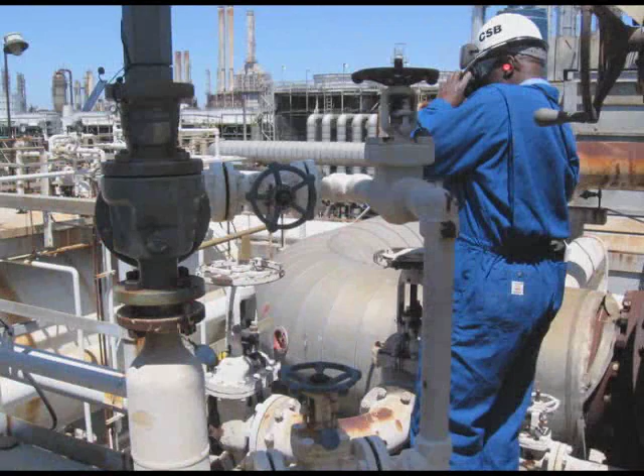This investigation was the largest and most comprehensive investigation in the history of the Chemical Safety Board. CSB Supervisory Investigator Don Holmstrom led a two-year investigation to determine the root causes of the accident. We interviewed over 370 witnesses. We looked at thousands of documents, literally millions of pages of documents, and we examined the plant, inspecting over 40 pieces of instrumentation and equipment.

The investigation team examined a wide range of safety systems, practices, and standards, and looked at human factors such as fatigue and communication between operators.

The board's report was released at a public meeting in Texas City on March 20, 2007. Then-CSB Chairman Carolyn Merritt presided.

Many of you here tonight had family members or co-workers who were victims of this explosion. To all of you, I express my deepest condolences and sincere wishes that society never allows another accident like this to occur. The tragedy at BP was the worst industrial accident in the United States in nearly 15 years.

The CSB concluded that it was the result of organizational and safety deficiencies at all levels of the company. We found that BP management had, for many years, overlooked warning signs of a possible catastrophic accident.

There's an old saying that if you think safety is expensive, try an accident. Accidents cost a lot of money, and not only in damage to plant and in claims for injury, but also in the loss of the company's reputation.

The reason why the Texas City accident has such an impact is because when people look at it, they can see that they are all in the same boat, that the problems which led to that accident are likely to be present at other sites around the world.

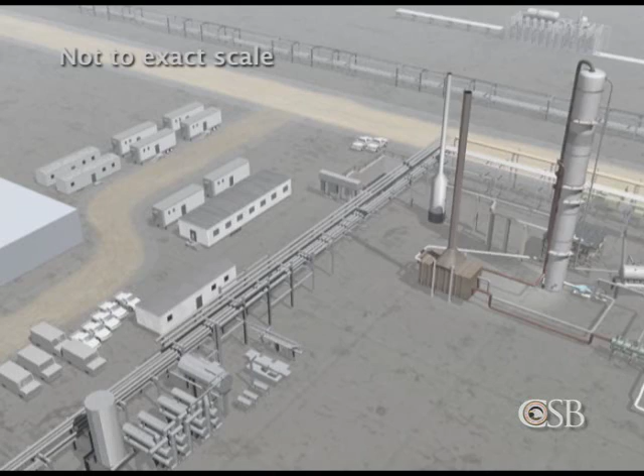Several units at the Texas City refinery had been shut down for lengthy maintenance projects, which required nearly 1,000 contractors to be on site along with BP employees.

BP had positioned a number of portable trailers close to process units for the use of contractors and other maintenance workers. Over a period of months, BP had located 10 trailers for workers servicing the ultra-cracker unit, including a double-wide wood-frame trailer that contained 11 offices and was regularly used for meetings.

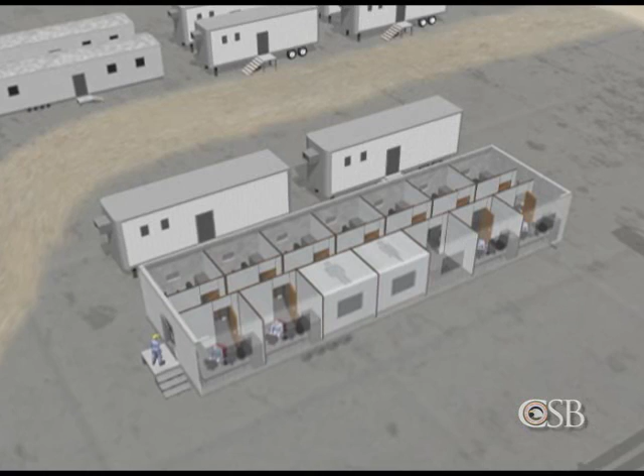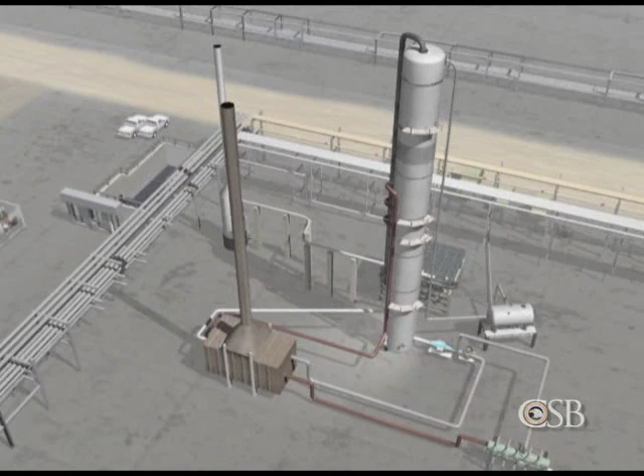Though these trailers were located near the isomerization unit, the occupants were not warned the ISOM unit was about to start up, a potentially hazardous operation.

At 2:15 a.m. on March 23rd, overnight operators began introducing flammable liquid hydrocarbons, known as raffinate, into a 170-foot tall raffinate splitter tower used to distill and separate gasoline components.

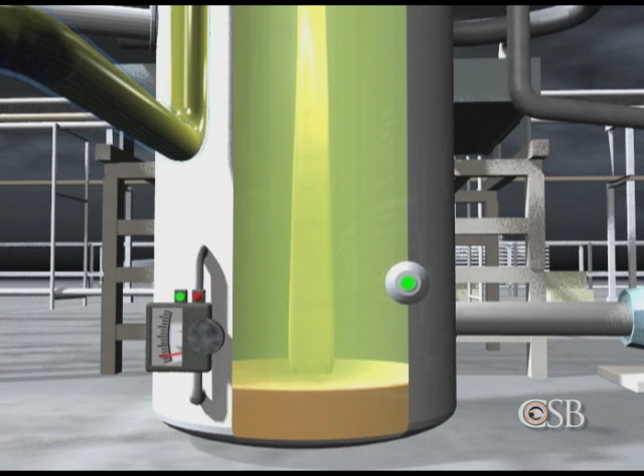Near the base of the tower, there was a single instrument that measured how much liquid was inside. It transmitted this information to a central control room located away from the ISOM unit. But this level indicator was not designed to measure liquid above the 9-foot mark.

During normal operation, the tower was only supposed to contain about 6.5 feet of liquid. But during startups, operators routinely deviated from written procedures and filled the tower above the 9-foot mark, concerned that if the liquid level fluctuated too low, it would cause costly damage to the furnace.

At 3:09 a.m., as the liquid neared the 8-foot mark, a high-level alarm activated and sounded in the control room. But a second high-level alarm, slightly further up the tower, failed to go off.

By 3:30 a.m., the level indicator showed that liquid had filled the bottom 9 feet of the tower, and the feed was stopped. The CSB later estimated that the liquid was in fact at a height of 13 feet. But operators could not know the actual level because the indicator only measured up to 9 feet.

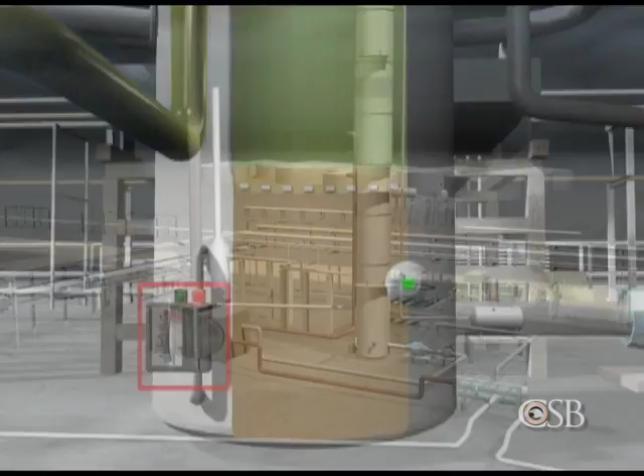The lead operator had been overseeing the startup from a satellite control room within the ISOM unit. At 5 a.m., he briefly updated the night board operator in the central control room about the startup activities. The lead operator then left the refinery early, an hour before the end of the shift.

A new board operator arrived in the control room around 6 a.m. to start his 30th day in a row working a 12-hour shift. He spoke briefly with the departing night shift operator and then read the logbook to prepare for the startup. But the logbook did not clearly indicate how much liquid was already in the tower and equipment, and it left no instructions on routing of the liquid feed and products when the startup resumed. Instead, the control board operator only found a one-line logbook entry that said, ISOM brought in some RAF to unit to pack RAF with.

At 7:15 a.m., the day shift supervisor arrived. Because he was more than an hour late, he received no formal briefing from personnel on the night shift about conditions in the ISOM unit.

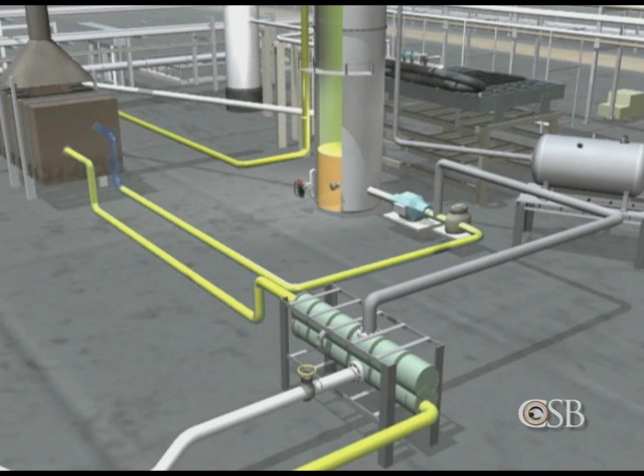At 9:51 a.m., operators resumed the startup. They began recirculating the liquid feed and adding more liquid to the already overfilled tower. As new feed was added, startup procedures called for regulating the liquid level in the tower using the automatic level control valve.

But the board operator and others had received conflicting instructions on routing the product. As a result, this critical valve was left closed for several hours, blocking the flow of liquid from the tower.

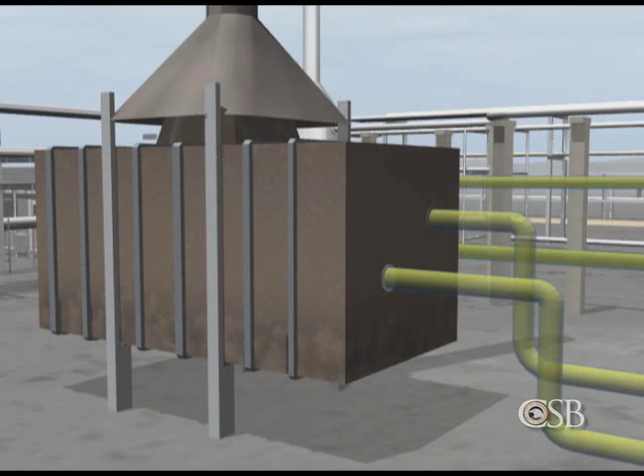A few minutes later, operators lit burners on the furnace to begin heating up the feed, part of the normal startup process. While the startup was underway, the day supervisor left the refinery on short notice just before 11 a.m. to attend to a family medical emergency.

Contrary to BP's own procedures, no experienced supervisor was assigned to replace him. This left a single control board operator, now without a qualified supervisor, to run 3 refinery units, including the ISOM unit, which needed close attention. The refinery had eliminated a second board operator position following corporate budget cuts in 1999 after BP acquired Amoco.

As the startup continued, the tower steadily filled with liquid, reaching a height of 98 feet shortly before noon, more than 15 times the normal level.

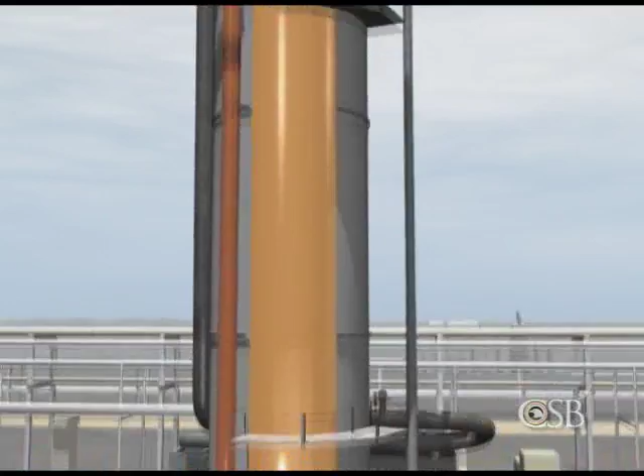But the improperly calibrated level indicator told operators in the control room that the liquid was at 8.4 feet and gradually falling. Furthermore, the control panel was not configured to clearly warn operators of the growing danger. It did not display flows into and out of the tower on the same screen, nor did it calculate the total liquid in the tower.

Meanwhile, the maintenance contractors, who were not involved in the operation of the ISOM unit, left their work trailers to attend a company lunch, celebrating a month without a lost time injury.

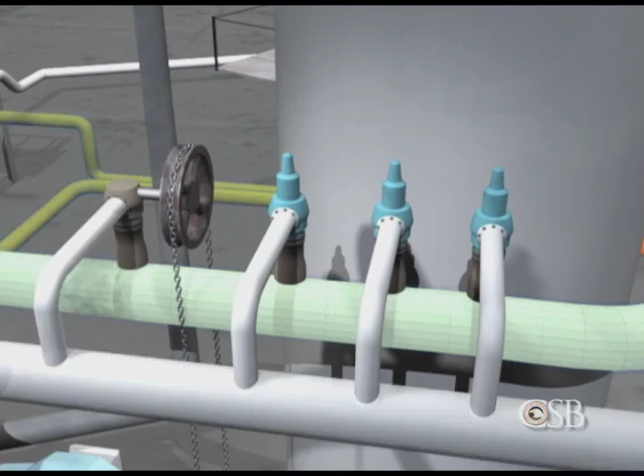At 12:41 p.m., an alarm activated as the rising liquid compressed the gases remaining in the top of the tower. Unable to understand the source of the high pressure, operators opened a manual chain valve to vent gases to the unit's emergency relief system, a 1950s-era blowdown drum that vented vapor directly into the atmosphere.

Operators also turned off 2 burners in the furnace to lower the temperature inside the tower, believing this would reduce the pressure. Nobody knew the tower was dangerously full.

The operators did become concerned about the lack of flow out of the tower and began opening the valve to send liquid from the bottom of the tower to storage tanks. But this liquid was very hot. As it flowed through the heat exchanger, it suddenly raised the temperature of the liquid entering high up the tower by 141 degrees Fahrenheit. It was now about 1 p.m.

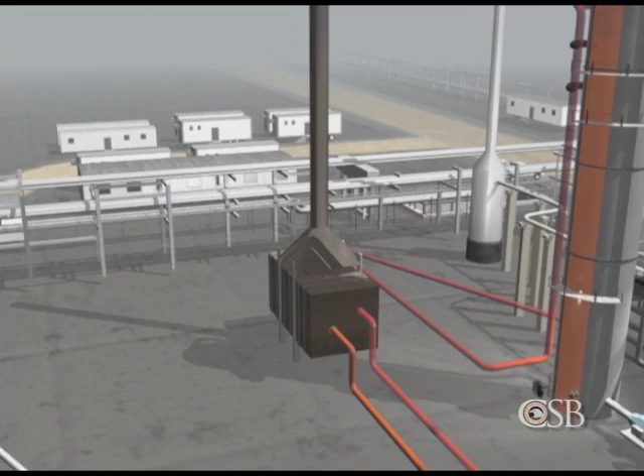Contract workers, unaware of the startup and the looming danger, returned from lunch and began a meeting in the double-wide trailer in the corner room closest to the blowdown drum.

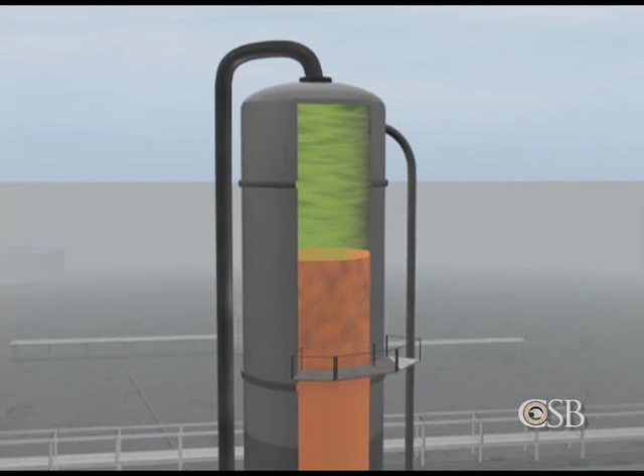Over the next few minutes, the hot feed entering the tower caused the liquid inside to start to boil and swell. Liquid filled the tower completely and began spilling into the overhead vapor line, exerting great pressure on the emergency relief valves 150 feet below.

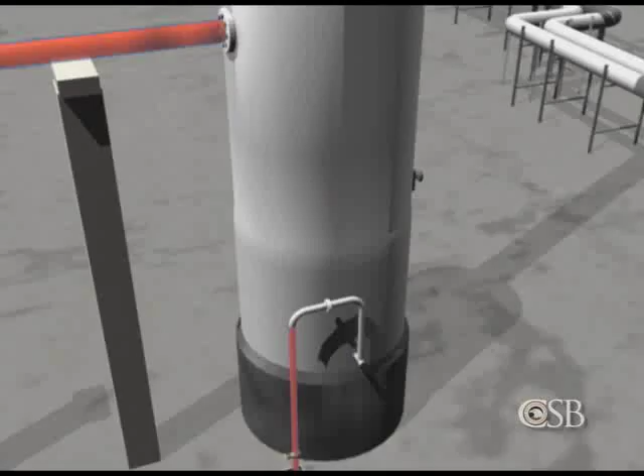At 1:14 p.m., the 3 emergency valves opened, sending nearly 52,000 gallons of flammable liquid to the blowdown drum at the other end of the ISOM unit. Liquid rose inside the blowdown drum and overflowed into a process sewer, setting off alarms in the control room. But the high-level alarm on the blowdown drum failed to go off.

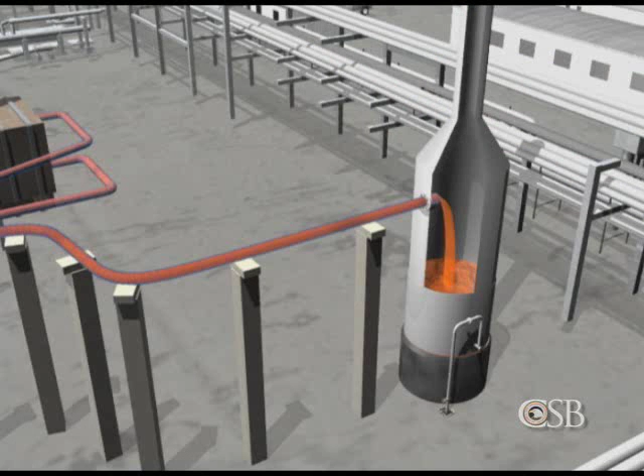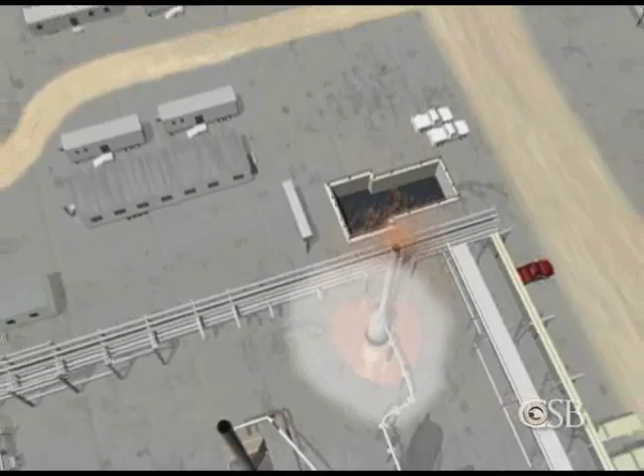None of the operators knew of the catastrophe unfolding in the ISOM unit. As flammable hydrocarbons overfilled the blowdown drum, operators nearby saw a geyser of liquid and vapor erupt from the top of the stack. The equivalent of nearly a tanker truck full of hot gasoline fell to the ground and began forming a huge flammable vapor cloud.

This scene, based on CSB computer modeling, shows how the vapor cloud expanded in just 90 seconds, engulfing the unit and the nearby trailers full of workers.

About 25 feet from the base of the blowdown drum, 2 workers were parked in a pickup truck with the engine idling. As flammable vapor entered the air intake, the diesel engine began to race. The 2 workers fled, unable to shut off the engine. Moments later, witnesses saw the truck backfire and ignite the vapor cloud.

Powerful explosions swept through the area. Computer modeling shows how the blast pressure wave accelerated through the ISOM unit, causing heavy destruction and igniting fires throughout the area. The workers inside the trailers were right in the path of the explosions. The fires continued to burn for hours.

12 of the 20 occupants of the double-wide trailer were killed, along with 3 workers in a trailer nearby. Dozens of others suffered serious burns, fractures, and other traumatic injuries. The wood and metal frame trailers were blown apart by the blasts. Firefighters struggled to rescue the injured and recover the victims.

50 large chemical storage tanks were damaged, and the ISOM unit remained shut down for more than 2 years.

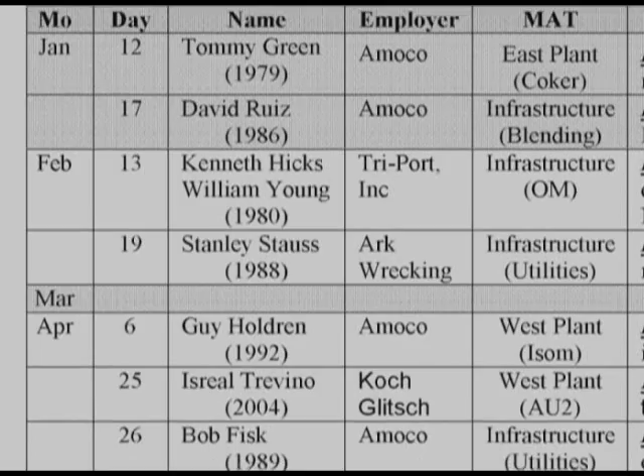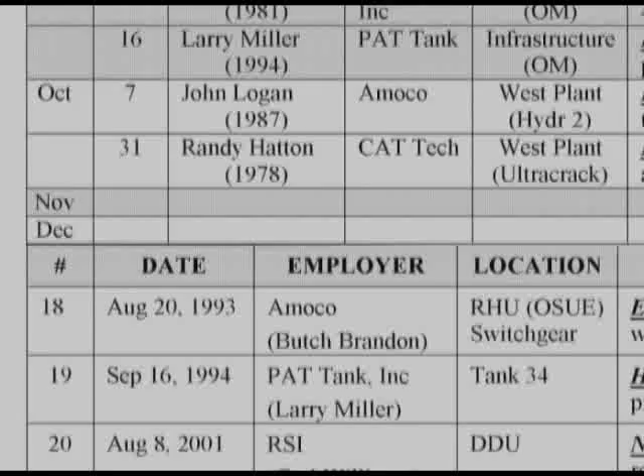During the early stages of our investigation, our team had noted there were multiple safety system deficiencies at the Texas City plant. We also found there was a history of fatalities at the plant. Prior to the March 2005 accident, 23 people died in accidents over a 30-year period at the Texas City refinery, beginning when it was owned by Amoco and continuing after BP acquired the refinery in 1999.

The CSB wanted to know what the connection was between this history of fatal incidents and the organizational and cultural factors. BP Corporation's lack of focus on preventing major accidents allowed budget cuts to be made without assessing the impact on process safety. The CSB found that cost-cutting, production pressures, and failure to invest significantly impacted the process safety performance at the Texas City refinery and left the refinery vulnerable to catastrophe.

After the merger with Amoco, BP ordered a 25% reduction in fixed costs at all its refineries. This impacted important process safety systems such as staffing, training, and mechanical integrity. The effects of the budget cuts became apparent in a number of internal BP documents made public following the accident.

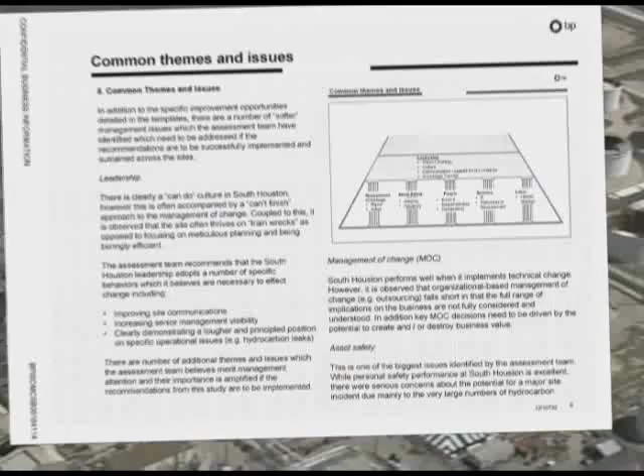In one, the refinery manager was quoted as having observed in 2002 that the infrastructure at Texas City was in complete decline. He ordered a study of the refinery's safety and mechanical integrity, a study which was shown to BP executives in London. That study warned of serious concerns about the potential for a major site incident following more than 80 hydrocarbon releases in the previous 2 years.

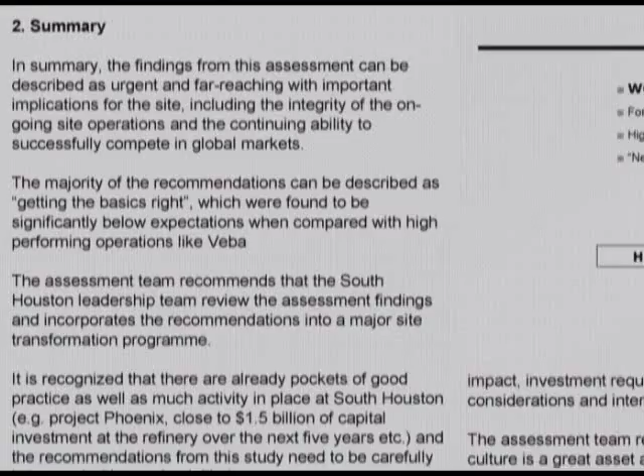The study also concluded that its own findings were urgent and far-reaching. A follow-up BP study in 2002 found the refinery's integrity and reliability issues were clearly linked to the reduction in maintenance spend over the last decade.

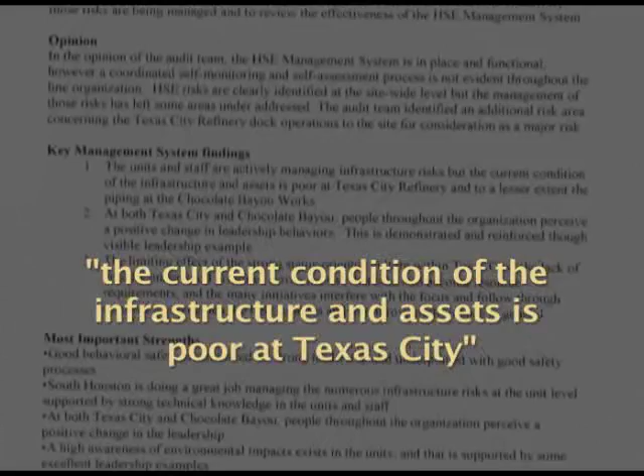In 2003, a maintenance assessment stated that cost-cutting measures have interfered with the group's work to get things right. Usually, reliability improvements are cut. And later that year, a company audit found the current condition of the infrastructure and assets is poor at Texas City, and that maintenance spending was limited by a checkbook mentality. Only the money on hand would be spent, rather than increasing the budget.

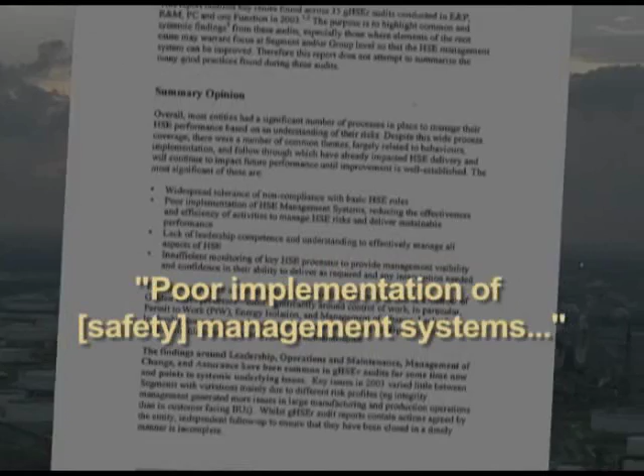In March 2004, BP auditors in London concluded that 35 business units around the world, including the Texas City refinery, suffered from a host of common safety problems, including widespread tolerance of non-compliance with basic HSE, or health, safety, and environmental rules, poor implementation of safety management systems, and lack of leadership competence and understanding.

There were a number of reports that were coming up to as high as the board level that indicated serious problems throughout the BP system. During 2004, the Texas City refinery had 3 major accidents. In addition to this process unit fire that caused $30 million in damage, 2 other accidents in 2004 resulted in 3 fatalities. Yet this same year, the refinery had its lowest ever recordable injury rate, a statistic that does not include fatalities.

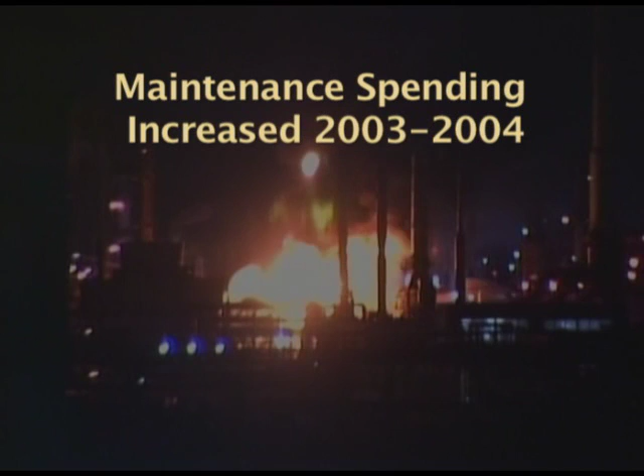The CSB found that maintenance spending increased between 2003 and 2004. But most of the increases were for responding to serious accidents and complying with environmental requirements, not for preventive maintenance.

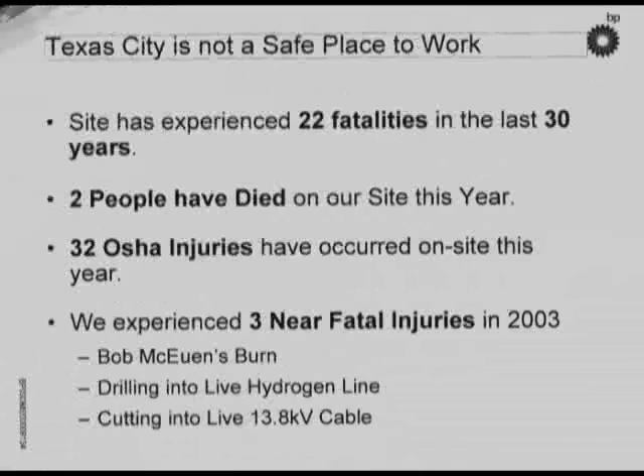Late in 2004, the Texas City refinery manager made a presentation to supervisors titled Safety Reality, reviewing fatalities at the plant over the past 30 years. One of the slides was entitled, Texas City is not a safe place to work.

BP did its own safety culture survey just prior to the accident. That survey indicated there was an exceptional degree of fear among employees of a major catastrophe. Among the findings: pressure for production, time pressure, and understaffing are the major causes of accidents at Texas City. Critical events, like failures or breakdowns, are generally not attended to. Production and budget compliance gets recognized and rewarded above anything else.

Sociology professor Dr. Andrew Hopkins has written extensively on the causes of industrial disasters. My feeling is that the solution to this problem of cost-cutting by senior people is to hold them responsible for the safety implications of those cost cuts, so that when they order a cost cut, they should personally be able to certify that these things will not have adverse safety consequences.

The Safety Culture Survey also pointed to the exceptionally high executive turnover at the refinery: 6 different business unit leaders, or BULs, in 7 years prior to the accident. The authors of the survey report concluded, we have never seen an organization with such a history of leadership changes over such a short period of time.

Many managers are in and out within a space of 2 years, and what they are assessed on is the profit they make on an annual basis. Now, am I, as a manager, going to spend a large amount of money to deal with some remote risk that is very unlikely to generate a major accident during my year or two on my watch here?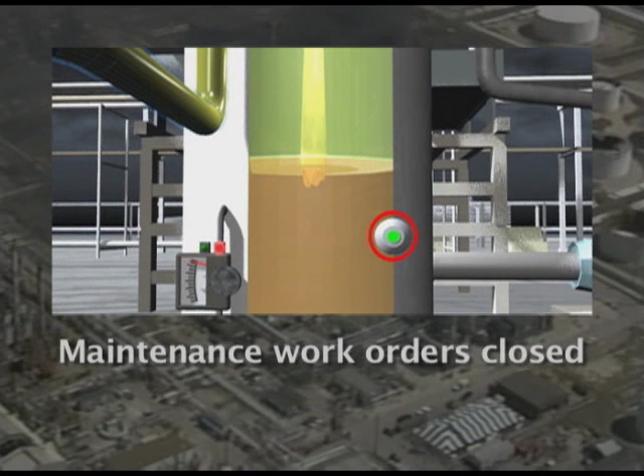For example, the tower high-level alarm had been reported as not functioning several times in the 2 years prior to the accident. But maintenance work orders for this alarm were closed, although the repairs were never actually made. Work orders could be closed out as completed, even though the work hadn't been performed.

This is important because we found that on the day of the incident, during the ISOM startup, there were a number of instruments and equipment that were not functioning properly.

On February 20th, 2005, a company safety manager wrote, I truly believe we are on the verge of something bigger happening. Then, 3 weeks later, a BP business plan recognized a number of key safety risks, including that TCS, or Texas City site, kills someone in the next 12 to 18 months. 8 days later, those fears were realized.

Here were these warnings. These audits were sounding very clear warnings. So why weren't they attended to? I think my feeling is that Texas City was virtually paralysed by the cost-cutting which had occurred at that site, and they were simply unable to respond to those warnings.

There needs to be somebody on the board of directors who can interpret those reports and be in a position to drive change effectively. The CSB's final report recommended that BP appoint an additional non-executive member of the board of directors with specific expertise in refinery operations and process safety.

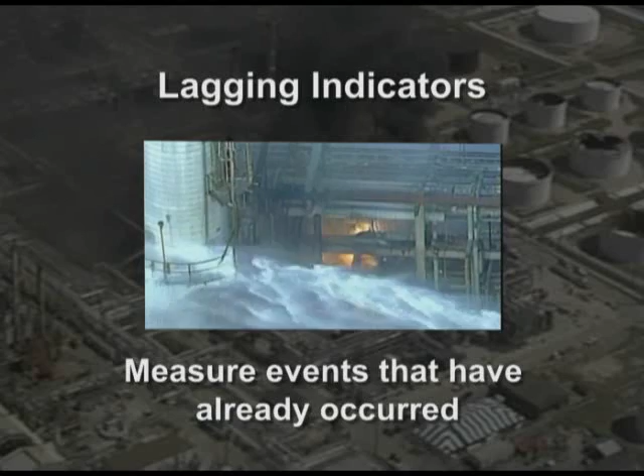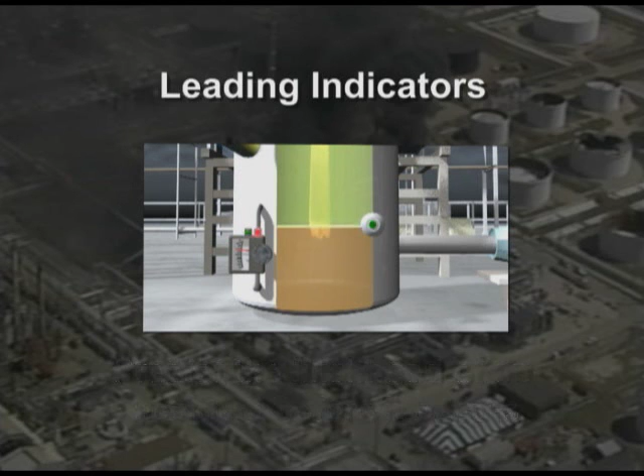You need to measure process safety performance with the appropriate indicators, both leading and lagging. Lagging indicators measure events that have already occurred, such as fires, explosions, and equipment failures. Leading indicators are designed to predict the likelihood of an accident before it occurs, for example, the percentage of equipment inspections that are overdue.

The opening of a safety pressure relief valve is itself an indicator that things are not as they should be. So we should count those and try to reduce the number of occurrences of those sorts of events.

But the investigation found that BP did not effectively use leading and lagging indicators to measure and drive process safety performance. For example, BP's pay plan rewarded managers primarily for controlling costs. The only safety metric used to calculate bonuses was the personal injury rate. Process safety was not considered.

The CSB final report recommended that the United Steelworkers Union and the American Petroleum Institute create a new standard for process safety indicators for the petrochemical industry. The board also called on BP to use leading and lagging indicators to strengthen refinery safety performance.

After an accident, managers often say, "I didn't know this was happening," or not happening, as the case may be. "If I'd known, I'd have stopped it." Now, this is bad management. It's the manager's job to know what is going on, and he can do that by going round, keeping his eyes open, and reading the accident reports in detail.

The CSB investigation noted that BP ignored numerous warnings of the potential for a catastrophic accident, a result of not having an effective reporting and learning culture.

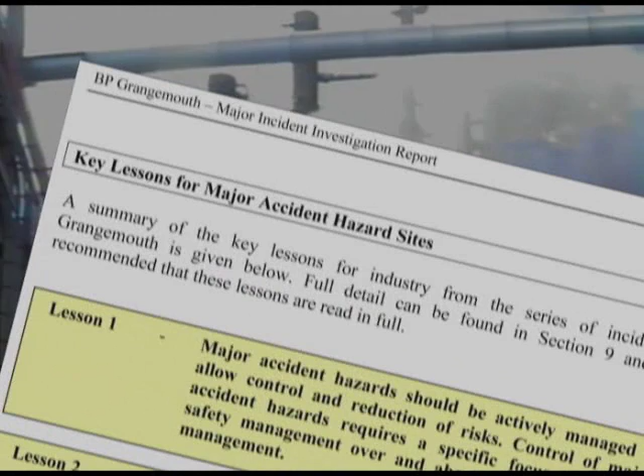There was a need for corporate and board oversight over process safety management. There was a need to develop leading and lagging indicators for process safety, and there needed to be an emphasis on process safety in order to prevent major accidents.

But the CSB found little awareness in Texas City of the lessons BP executives promised would be learned worldwide after Grangemouth. As British regulators concluded, BP's decentralized management structure impaired learning from previous incidents.

And the reason why BP failed to learn these lessons from other events, the reason why they seem to have this, what I would call learning disability, lies in the way in which the organisation was designed. It lies in the bonus systems of payment. It lies in the decentralised structure of the organisation. It lies in the organisational location of process safety experts.

The CSB found that following the 1999 merger with Amoco, BP dismantled Amoco's existing centralised safety structure. The reorganization left a diminished process safety function that no longer reported to senior refinery leadership.

I think one of the lessons coming out of that is that if an organisation judges something important, it will locate people towards the top of the apex in that organisation, people with responsibility for that. And the fact that the process safety manager was further down the line is yet another indication of the lack of focus on process safety.

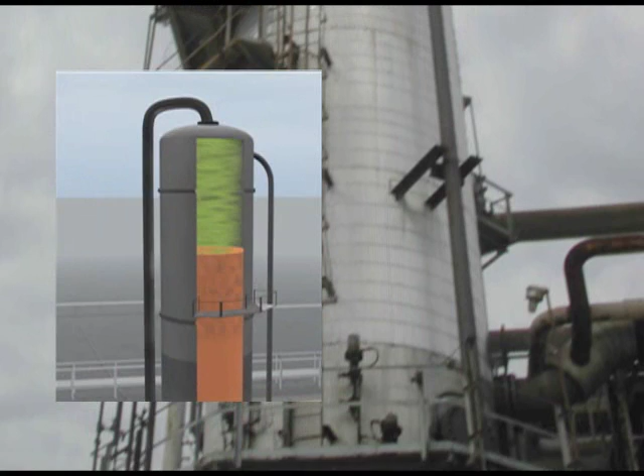But even though high levels and pressures could have led to a catastrophic accident, the previous startups were never investigated as near misses, and procedural deviations became accepted as normal. The CSB investigation also found 8 serious releases of flammable vapor from the ISOM blowdown drum, 2 of which caught fire between 1994 and 2004. Only 3 of the incidents were ever investigated.

It's widely recognized now that you should investigate near misses, or really near accidents as they're called, as thoroughly as you investigate accidents. After all, it's only a matter of luck whether a leak of flammable liquid or gas catches fire or not. In our final report, the CSB recommended that BP's Board of Directors establish a system to encourage reporting of incidents without fear of retaliation, to investigate and implement prompt corrective actions, and to communicate lessons throughout the company.

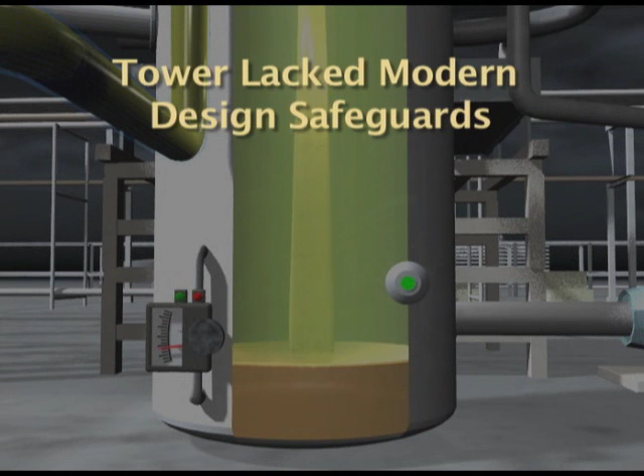The first choice after an accident is to say, how can we improve the design so this can't happen? How can we remove the opportunity for errors? Even as releases occurred over many years in the ISOM unit, BP continued using equipment based on outdated designs. The raffinate splitter tower lacked modern design safeguards, such as redundant level indicators and alarms, a differential pressure indicator, and automatic interlocks to prevent overfilling.

In a well-designed plant, a simple error like closing the wrong valve shouldn't result in an accident. The design of the emergency pressure relief system was also outdated. Relief valves vented hydrocarbons directly to the atmosphere through an antiquated blowdown drum, which was first installed in the 1950s. The CSB report said the hydrocarbons should have been routed to an inherently safer disposal system, such as a flare, to contain the hydrocarbon liquid and burn off flammable vapor.

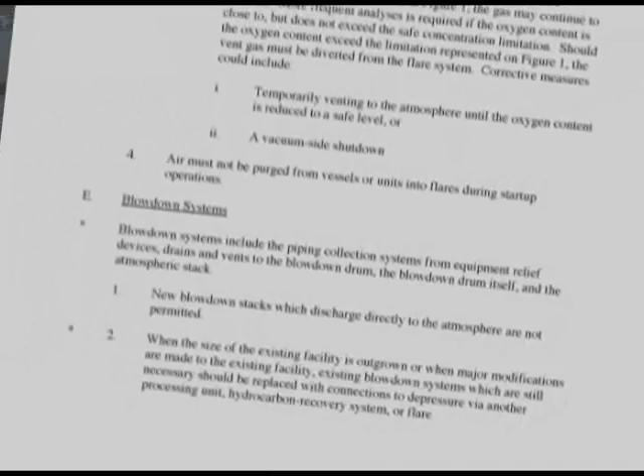In fact, the investigation found that Amoco's own safety standards, later adopted by BP, stated that new blowdown stacks which discharge directly to the atmosphere are not permitted. As facilities were upgraded, existing blowdown systems which are still necessary should be replaced. On several occasions prior to the incident, BP had seriously considered connecting a flare to the ISOM unit. In the early 1990s, when Amoco owned the refinery, 3 proposals were made to replace blowdown stacks at Texas City. 2 more proposals were made in 2002, after the merger with BP. However, these decisions were impacted by production pressures and budget cuts, and the flare was never constructed.

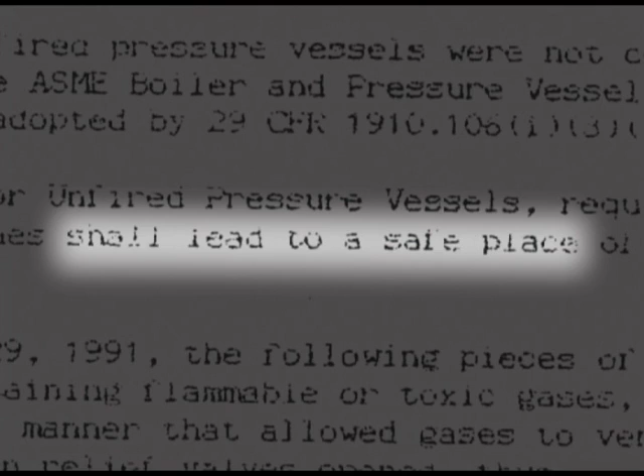In 1992, OSHA conducted an inspection at the Texas City refinery because there had been a release from a very similar blowdown drum in a different process unit. OSHA cited the then-Amoco refinery for the unsafe blowdown system. OSHA determined that the design of the blowdown drum was unsafe because it relieved to atmosphere, not to a safe place. But OSHA later withdrew the citation after Amoco asserted the equipment conformed to American Petroleum Institute standards.

In October 2006, the board issued a recommendation to the American Petroleum Institute calling for new guidelines that warn against the use of blowdown drums similar to those found in Texas City. We also recommended that OSHA implement a national emphasis program for all oil refineries focused on the hazards of blowdown drums that release to the atmosphere. Whenever possible, companies should use inherently safer systems, such as flares, instead of blowdown drums.

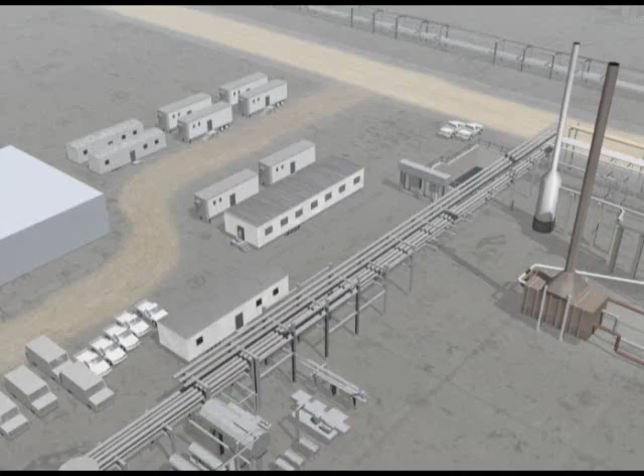The presence of occupied trailers near the blowdown stack added to the hazards of venting flammable material to the atmosphere. Prior to the incident and prior to the startup of the ISOM unit, a number of occupied trailers had been placed close to the ISOM unit. These trailers were occupied by workers not involved in the turnaround activities. The investigation found this was a key factor leading to the deaths of the workers. They were right on top of the process, in trailers as close as 120 feet from the blowdown drum, which is right at the edge of the isomerization process.

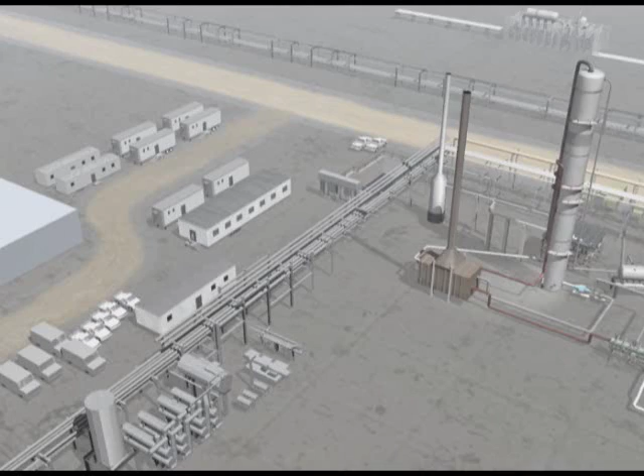CSB investigator Mark Kaszniak: It is not safe to have trailers that close to a blowdown drum, or at the edge of an active process in a petroleum refinery. During an explosion in a refinery, you're actually safer in the open atmosphere than working inside a trailer. This is because the explosion overpressure will destroy the weak trailer construction, resulting in the formation of missiles and walls collapsing, which is potentially fatal to the occupants.

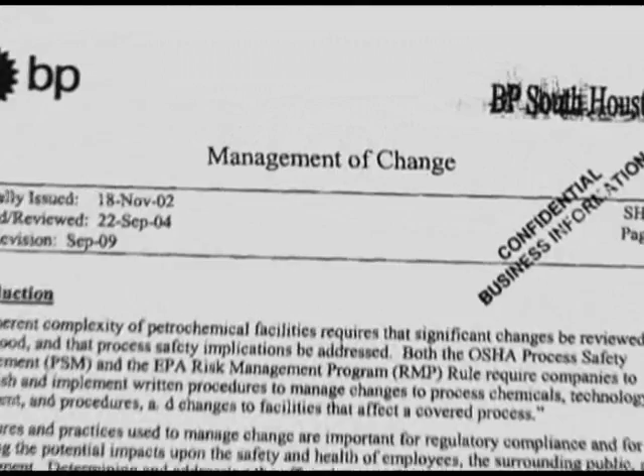The CSB determined that industry siting guidelines did not adequately protect trailer occupants from the fire and blast damage that can occur hundreds of feet from an explosion like the one at BP. We found that these guidelines were not safe enough prior to this accident and resulted in placing people in harm's way. In addition, BP did not follow its own management of change procedures before placing most of the trailers in a dangerous location. They did not assess the blast hazards posed to the trailer, and action items created during the review were never followed up and corrected. Ultimately, the decision on where to place the trailers was largely based on convenience, not safety.

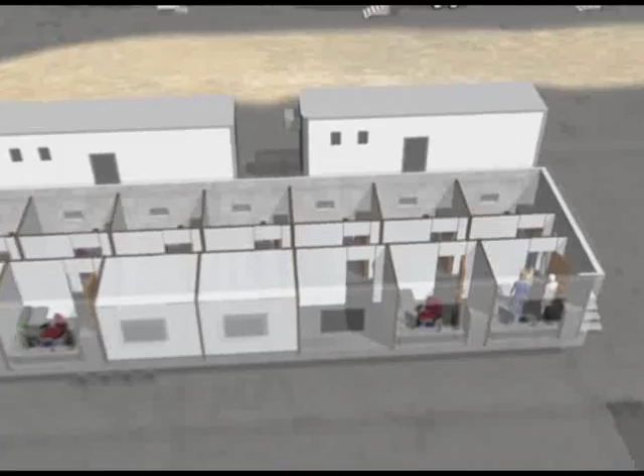Contrary to BP startup procedures, on the morning of March 23rd, managers did not remove personnel from the nearby trailers, or even alert them that the potentially hazardous startup was taking place. The explosion totally destroyed 13 trailers and damaged 27 others, some as far away as 1,000 feet. People inside trailers as far away as 479 feet were injured.

In October 2005, the CSB issued an urgent recommendation to the American Petroleum Institute to revise industry standards and establish minimum safe distances for occupied trailers away from hazardous process areas. On June 21, 2007, the American Petroleum Institute issued new industry guidelines to minimize the presence of people and occupied trailers in hazardous process areas.

For a long time, people were saying that most accidents were due to human error. And this is true in a sense, but it's not very helpful. It's a bit like saying that falls are due to gravity. There were a number of human errors that contributed to the overfilling of the tower and the disaster that followed at Texas City. No one shows up to work planning to make mistakes. So we looked at the conditions in the workplace that would make error more likely. You really need to look at why the operators did what they did. CSB Human Factors Specialist Cheryl MacKenzie.

There were a number of human factors issues involved with this incident, including fatigue of the workers, training that was insufficient, and procedural deviations that occurred during the startup. The CSB investigation found that underlying conditions in the ISOM unit encouraged operators to consciously deviate from written operating procedures. Why did they make that judgment? I think they did because these procedures were, some of them, out of date, some of them inapplicable. They were routinely not following these procedures, and nobody had said otherwise—nobody had said, hang on, you must be following these procedures.

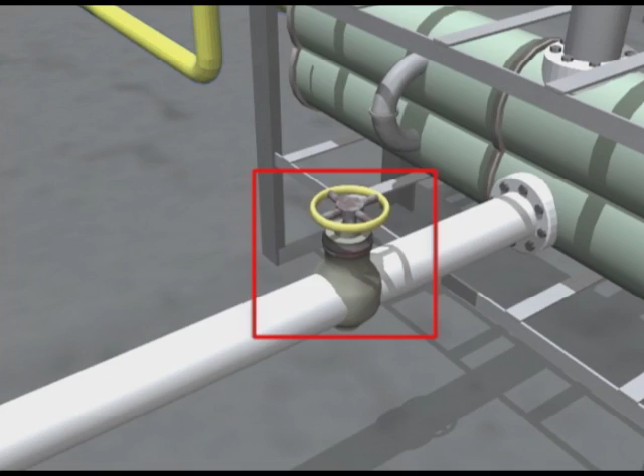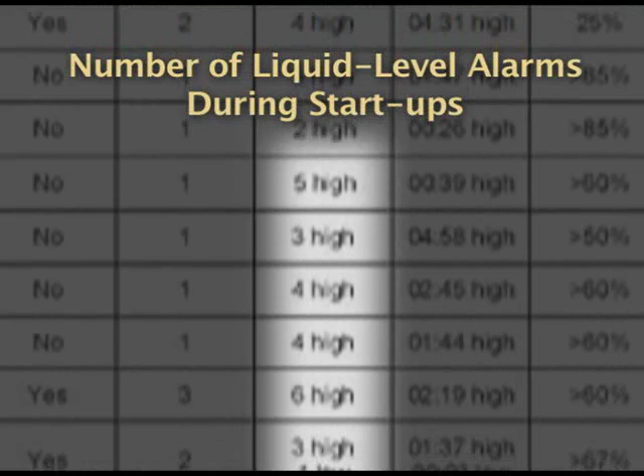The investigation found that operators were concerned that if they let the liquid level in the tower get too low during startups, it would damage the furnace. So they had adopted an informal procedure of adding extra liquid to the tower during startup. To do this, they placed the level control valve in manual, not the automatic mode required by procedures, and left the valve closed to raise the liquid above the recommended 6.5-foot level. So routine had this practice become, the CSB found that the tower's high-level alarm had activated 65 times during the previous 19 startups.

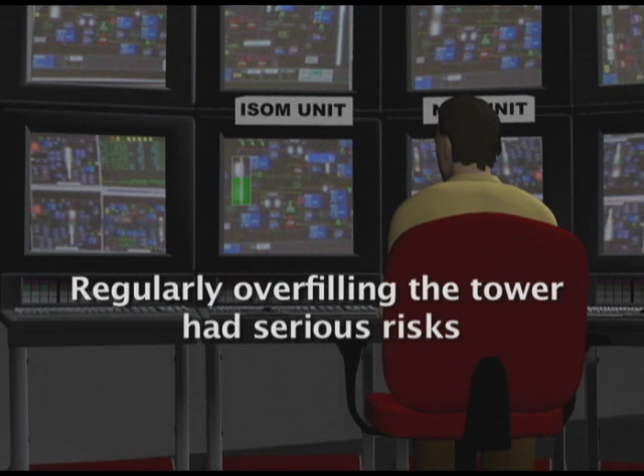The outdated operating procedures for the unit did not establish any safe upper limit for the liquid level in the tower. Unknown to operators, regularly overfilling the tower had serious risks. The tower's liquid level transmitter had a limited range, and should the liquid rise above the maximum reading of 9 feet, operators could not know if the tower was dangerously overfilling. This informal practice of running the level in the raffinate splitter tower above the range of the transmitter led to running blind.

They weren't aware of the dangers of overfilling the column, so they tended to err on the side of what they saw as caution by overfilling it. Their systematic deviation from what they should have been doing was actually well-intentioned—it was with the interests of the company at heart that they were violating the startup procedures.

But on the day of the accident, the routine deviation of overfilling the tower above the range of the indicator coincided with a number of instrument failures, which impaired the board operator's decision-making. This had tragic results, as the board operator lost awareness of just how high the level was.

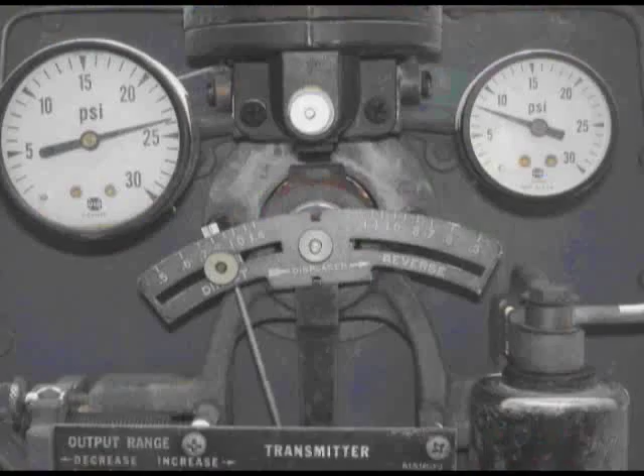The tower level indicator had been calibrated for years based on 1975 data for a different liquid used in a different process. As a result of the miscalibration, the indicator showed the level in the tower was declining just prior to the explosion, when it was actually increasing.

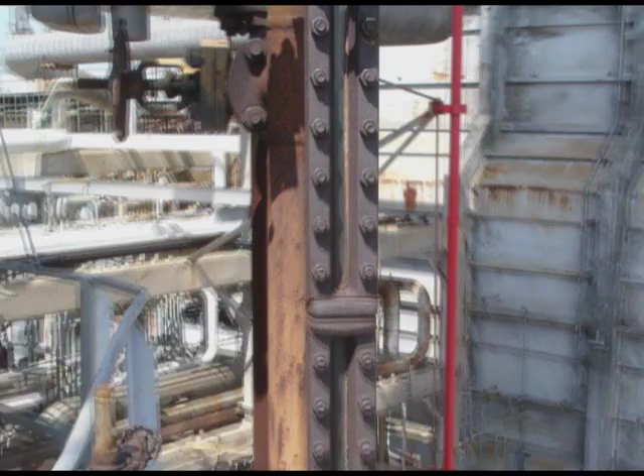A backup high-level alarm on the tower failed to activate, seeming to confirm that the liquid level was dropping. A sight glass on the tower was dirty and unreadable and could not be used to visually check the liquid level. The investigation concluded that the board operator truly had no functional and accurate measure of the tower level on March 23, 2005.

And when the liquid finally did spill over into the blowdown drum, the high-level alarm there failed to go off. BP procedures required that alarms, instruments, and other equipment be checked for their functionality prior to startup. The CSB determined that these checks were largely not performed.

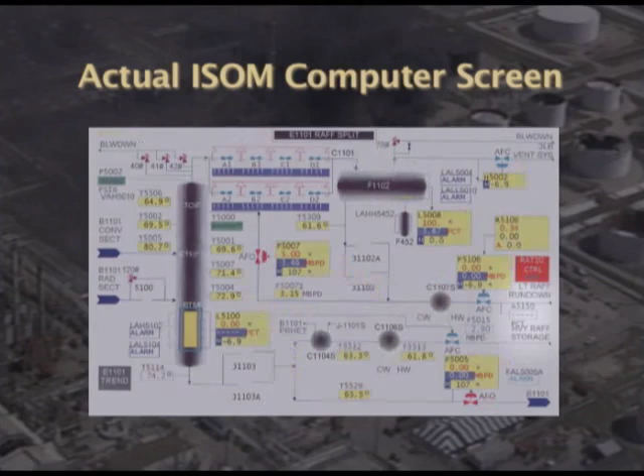A poorly designed computer display in the control room added to the difficulty of determining if the splitter tower was overfilling. Liquid flows into and out of the tower were not shown on the same screen, even though the computer could have been configured to do so.

The investigation also found that communication problems among BP personnel during the morning of the startup increased the likelihood of errors. Operators received contradictory instructions on where to send the products from the tower, and the day shift operators never got clear information from the night shift about how much liquid the tower already contained.

The board operator and the other operators who came in during the day shift really didn't understand what had occurred the night before. So they're starting up this unit without full knowledge of its state, making judgments and decisions based on incomplete information.

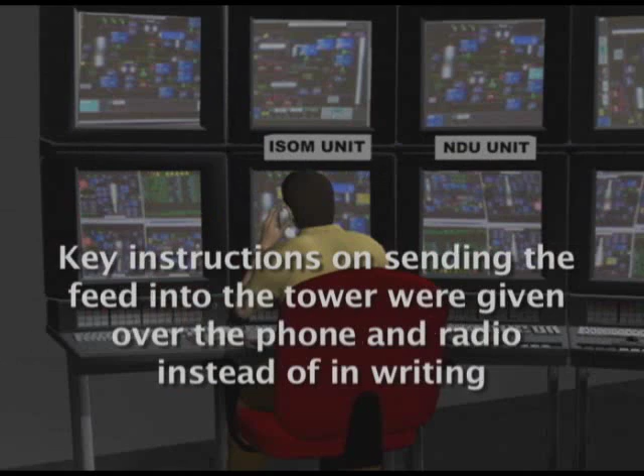The investigation found that BP lacked adequate policies and a management emphasis on effective communications. Key instructions on sending the feed into the tower were given over the phone and radio instead of in writing. Operators later told investigators these verbal communications were rushed and vague, and written communications in the logbook were brief and unclear.

Night shift operators did not conduct a crucial face-to-face meeting to brief day shift operators on the conditions in the unit. Therefore, they didn't realize how much liquid was in the tower and the equipment, so they added more, which led to the subsequent overfilling of the tower, which later led to the release.

The opportunities for human error were multiplied by the lack of adequate supervision, staffing, and training at the refinery. Training had been downsized and was largely delivered through computerized means rather than face-to-face training. BP did not train operators on the hazards of overfilling towers, and training for abnormal situations was insufficient. Despite recommendations dating back five years, simulators were not used to train board operators on making critical decisions.

As noted in an internal BP email about simulators three weeks after the accident, the big pushback has always been initial cost. Budget pressures also impacted control room staffing. BP implemented a 25% cost reduction in '99, and during the same period downsized the board operators in the ISOM unit from two to one.

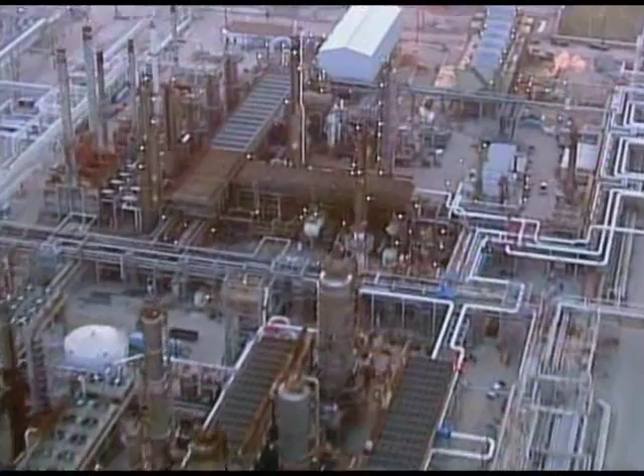Later, BP added an additional process unit to the responsibilities of the board operator in the ISOM unit. The result was that you had three complex refinery units under the supervision of one board operator. According to BP's own assessment, even under normal conditions, monitoring and controlling these three units would require 10.5 hours of the board operator's 12-hour shift.

But the startup of the ISOM unit would demand significantly more time and attention from the operator, whose workload was already nearly full. And when the startup began to encounter problems late that morning, supervisory oversight of the board operator was absent.

BP's own policies required that a supervisor or technically trained person be present during startup because it's an especially hazardous period. The supervisor who showed up on March 23rd left due to a family emergency, and there was no replacement.

Finally, investigators looked at the role operator fatigue played as a human factor contributing to the accident. Fatigue can affect performance in many ways. It can cloud decision-making, delay responses to actions on a control board, and lead an operator to miss out on what's going on overall in a unit. Fatigue can impair judgment, leading an operator to fixate on one operational parameter, such as the declining level, and lose track of other factors, such as liquid being added to the tower for 3 hours with no liquid being removed.

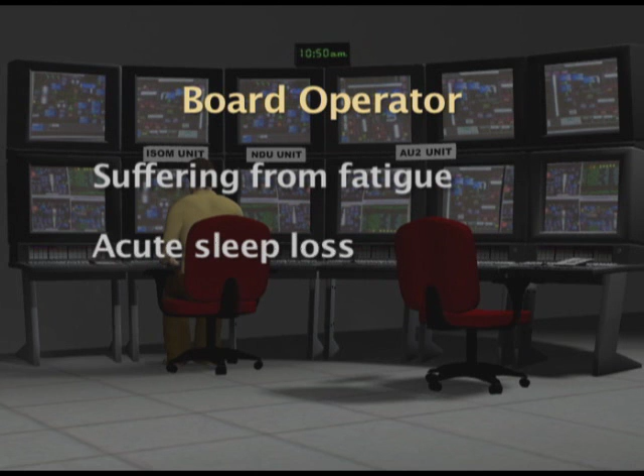ISOM unit operators had been working 12-hour shifts for at least 29 days prior to the accident. In particular, the board operator was likely suffering from fatigue, including acute sleep loss and a cumulative sleep debt of more than 43 hours.

We determined that BP had no fatigue prevention policy, and in fact there was no fatigue prevention policy in the industry as a whole. Companies and employees may believe they benefit from overtime schedules, particularly during maintenance turnarounds, but operator fatigue can have deadly consequences. Our final report recommended that the United Steelworkers and the American Petroleum Institute develop new guidance on preventing fatigue in the petrochemical industry, including limits on hours and days at work.

OSHA's 1992 Standard on Process Safety Management, or PSM, requires thousands of oil and chemical facilities to implement 14 management elements to prevent catastrophic releases. The Environmental Protection Agency has similar requirements under its risk management program.

The CSB investigation revealed many long-standing deficiencies in the BP refinery's compliance with federal process safety regulations. Preventive maintenance and testing procedures were inadequate for key alarms, instruments, and equipment. Required safety studies of pressure relief systems were years overdue. Operating procedures were out of date. And there were other flaws.

Management of change reviews were not conducted for critical design, equipment, and procedural changes. Hazard analyses were poor, overlooking serious fire and explosion risks. Audits revealed many process safety problems, but they were never resolved.

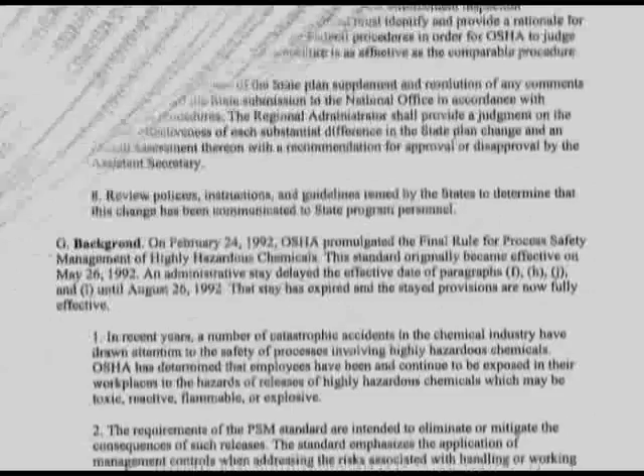OSHA's enforcement program for the PSM regulations requires planned, comprehensive inspections of facilities with accident histories or other indications of catastrophic risks. A 1992 OSHA directive stated the primary enforcement tool would be the Program Quality Verification Inspection, or PQV, a large, complex audit involving highly trained OSHA inspectors and taking weeks or months to complete.

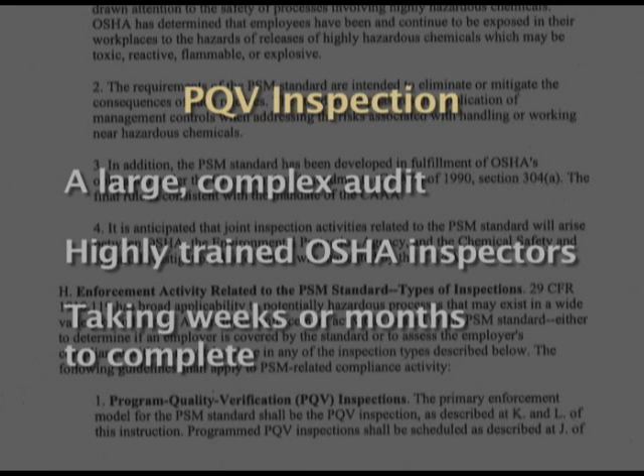Despite the fact that the BP Texas City refinery had a long history of fatality incidents, there was no program quality verification or intensive PSM inspection conducted at that refinery. OSHA did conduct smaller, unplanned inspections of the Texas City refinery in response to accidents and complaints, but these inspections did not uncover major flaws in process safety management compliance.

In fact, the CSB found that OSHA conducted only a handful of program quality verification, PQV inspections, at the thousands of regulated facilities across the country. There's no set interval when OSHA comes in and inspects a plant in the United States. We found that inspections in the U.S. are largely driven by personal injury statistics.

In the United Kingdom, 105 specialists from the Health and Safety Executive inspect high-hazard facilities every 5 years. In addition, all 9 refineries in the UK are inspected annually.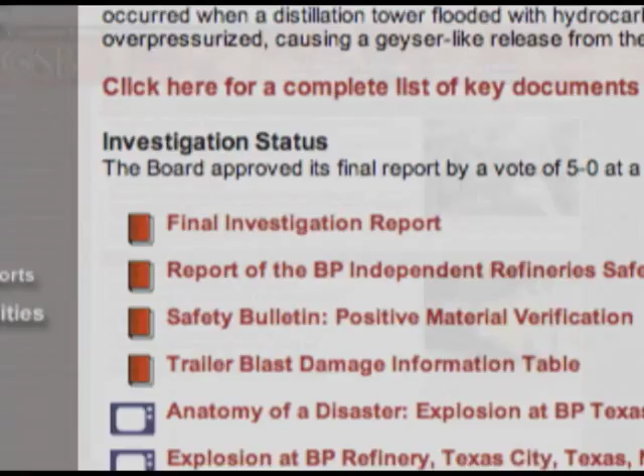The BP tragedy was years in the making, but it was by no means inevitable. We hope our investigation will provide all of industry with valuable lessons to assure such a tragedy will not be repeated. For the CSB's final report, key investigation documents, the Baker Panel report, and other information, please visit the Chemical Safety Board website at csb.gov.

BP cooperated with the CSB investigation and provided documents and witnesses voluntarily. After the Texas City accident, BP acted to relocate trailers, eliminate blowdown drums, and invest billions of dollars to upgrade the condition of its U.S. refineries. In 2007, BP accepted the recommendations of the Baker Panel, including a call to become a recognized industry leader in process safety management.